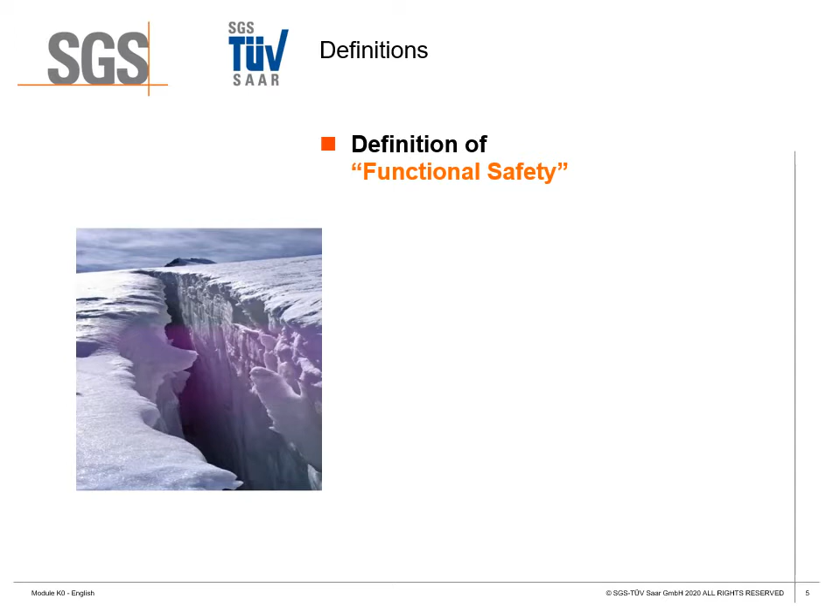Today I want to tell you a little bit about functional safety and its implementation in the automotive industry with ISO 26262. So first of all, some definitions to understand what is the meaning of functional safety. In ISO 26262 you will find the following definition. Functional safety is defined as absence of unreasonable risk due to hazards caused by malfunctioning behavior of EE systems.

I think this is a rather complex sentence, and before I explain more, I will give some more definitions about the content here. What is meant by unreasonable? Unreasonable can be seen as unacceptable, or in other words, it should be acceptable. So absence of unreasonable means there's no unacceptable risk available.

The definition of risk is also very important to understand. It is always a combination of two things: the probability and the extent of damage. If the probability is high, there's no need for a high extent of damage, and we still talk about a high risk. Or even if the extent of damage is very high and the probability may be low, even then we can talk about a high risk.

At the end of the day, we will talk more about the probability. We'll see that we have to reduce the probability of damage, and with this we may reduce the risk in total. And finally, the definition of hazard. A hazard can be seen as a state which may be dangerous for health and life. It's also important to understand that functional safety, and safety in general, talks about health and life. This is an important point to understand here.

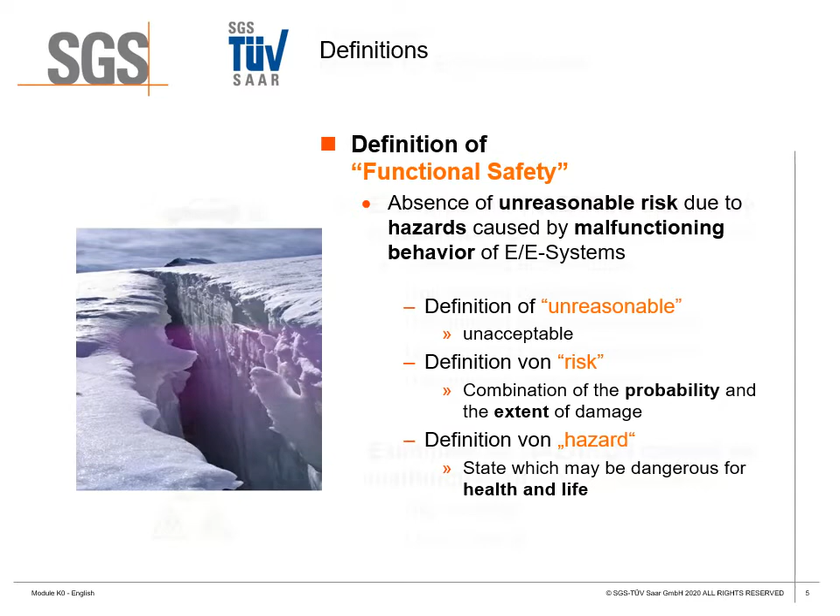Here are some examples of hazards caused by EE malfunctions. Examples of hazards caused by malfunction of operating functions are unintended acceleration, unintended deceleration, unintended loss of acceleration, unintended loss of deceleration, unintended vehicle motion, and so on. That means electronics in operating functions of the vehicle can directly lead to an unwanted behavior, to these so-called hazards.

But there are also examples of hazards caused by malfunction of safety functions. For example, we have an isolation detection or airbag function or whatever else. The loss of these functions or their malfunction may lead to high voltage, overheating, and so on. That means even functions which we bring into vehicles for safety reasons have the potential of a risk which is maybe not accepted.

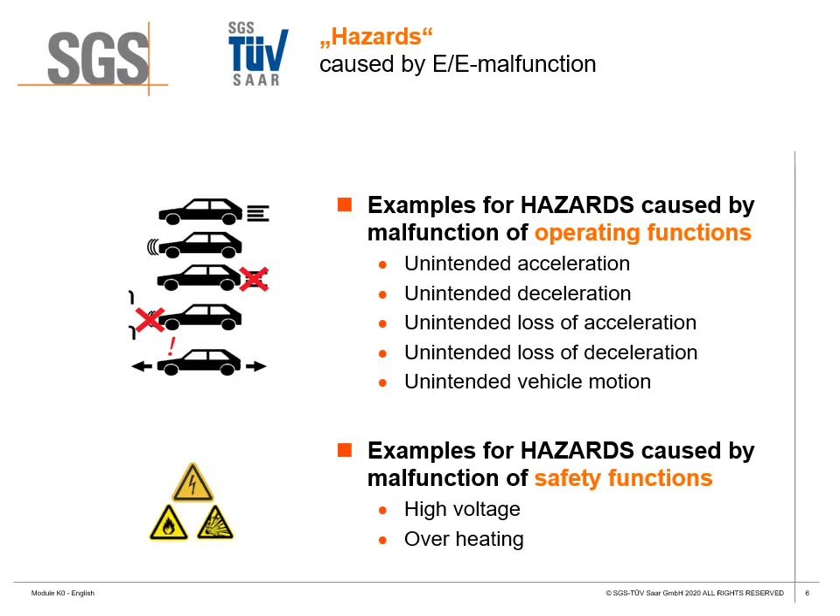So in general, we have to check which hazards may result from EE malfunction. This is typically done in a so-called hazard analysis and risk assessment. So how is it typically done? The first step is to identify potential EE malfunctions. This can sometimes be very difficult. First, we have to describe in detail the function which we implement in the vehicle, and then understand what a malfunction is.

Typically, a malfunction means the function is done at the wrong time. For example, we have a park brake, and the park brake works during driving. This can be dangerous. Or the function is not performed whenever it is wanted. For example, if we have an accident and the airbag shall open and it does not open, this is also a malfunction. This is the first step to understand what EE malfunctions are.

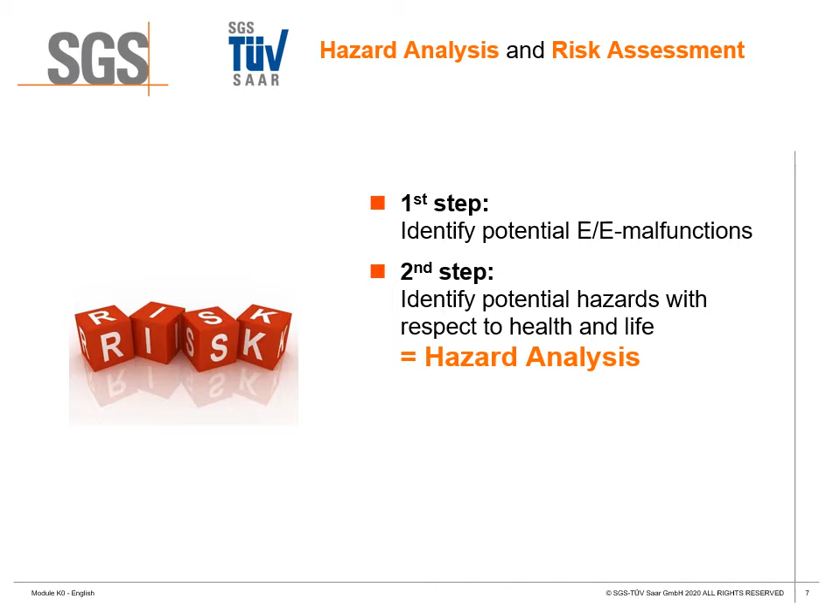The second step is to identify potential hazards with respect to health and life. This is the so-called hazard analysis. That means we have the malfunction and the typical potential hazards, as we had seen just before, an unwanted behavior of the vehicle at the end.

And finally, whenever we know the hazards, we can talk about the risks. The third step is to assess the combination of the probability and extent of damage in case a hazard occurs. This means we have to assess the risk, and this is called the risk assessment. Both things together are called hazard analysis and risk assessment, and very often we see the abbreviation HARA. This is what we have to do first before we know whether we have to go on with ISO 26262 or whether ISO 26262 does not have to be used.

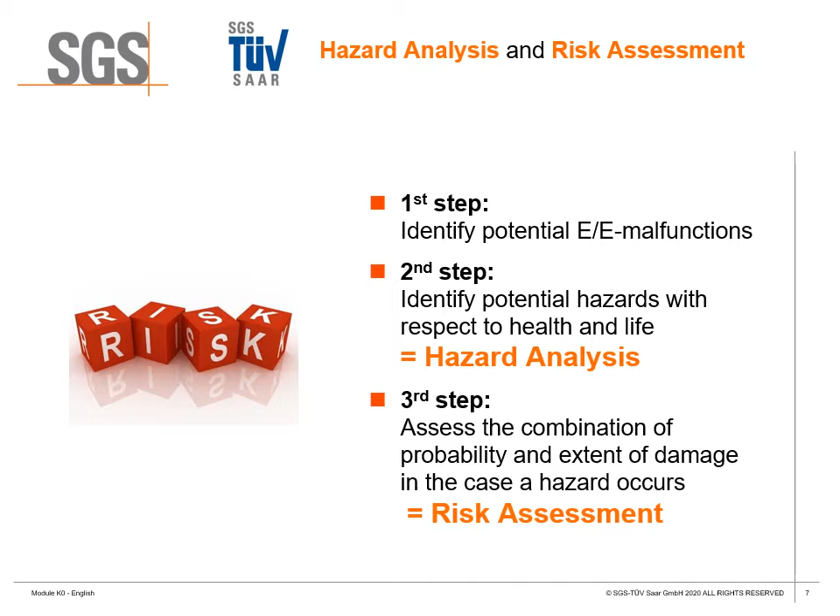Here, the risk assessment principle is shown in a graphic. It's only a qualitative graphic, of course. We have the severity of harm and we have the probability of occurrence of harm. And we have an imagined line, here called the risk acceptance limit. If we are above this limit, we are in the unacceptable risk area. If we are below, this is acceptable.

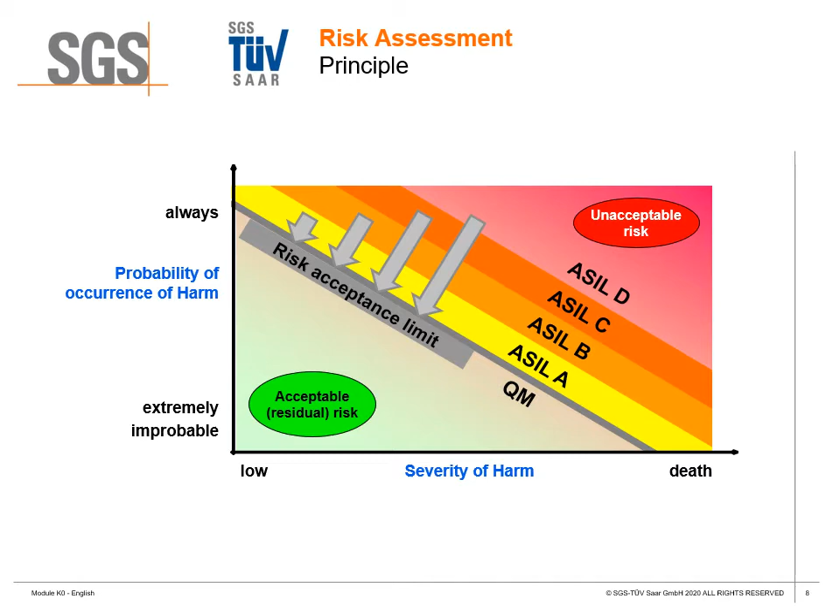And what we see here is already the level of risk which we can show: QM, which means acceptable risk, and ASIL A, B, C, and D. And this is what ISO 26262 is. It introduces a so-called level of risk for automotive functions and systems. It's a little bit curious that it's not called level of risk. It is called automotive safety integrity level.

So what does integrity level mean? We will see now, but first let me explain how it is defined. It is a 5-step scale. It starts with QM, what we had seen in the slide before. And then if the risk is higher, we talk about ASIL A, B, C, and the highest one is D. QM in this context means standard quality assurance is sufficient. Typically it is oriented to application of IATF 16949 or ISO 9001. These are quality standards which are typically used in the automotive industry.

In other words, QM means we have sufficient things already in place to reduce the risk to the accepted level. ASIL A, B, C, or D, shown here as ASIL X, means additional risk reduction measures are required. In other words, we have to do additional things beyond our QM measures. And the ASIL then describes the required integrity which has to be achieved by the determined so-called safety goals as highest safety requirements in the vehicle.

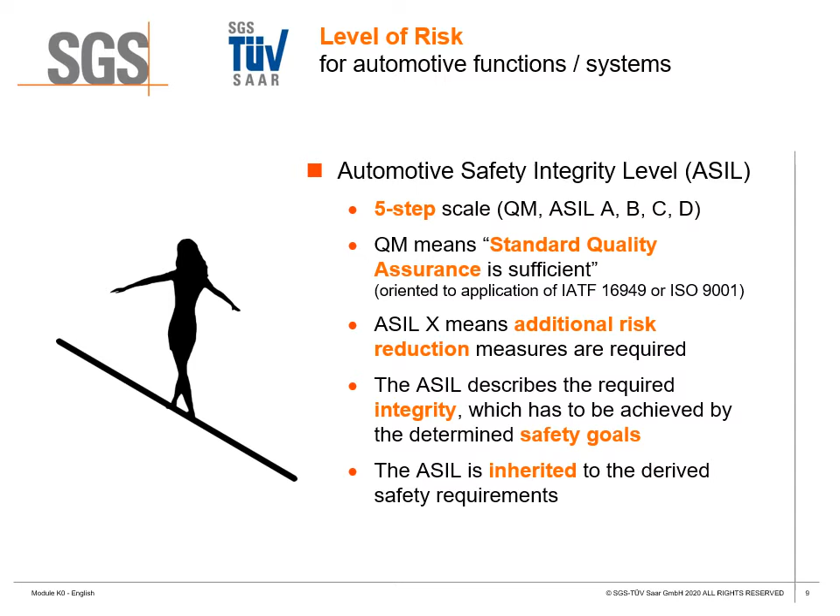So ASIL D has the highest risk, but ASIL D means that we need the highest level of integrity to achieve the safety goal, which is defined as: the driver airbag shall not deploy in an unwanted way. This safety goal has to be achieved with the highest integrity level of D. So this is the meaning of the ASIL. It should be clear that the ASIL is always combined with a requirement. It is nothing else than the integrity requirement of a requirement which we have defined at the top level in the vehicle, called safety goals.

But now, what do additional measures to reduce the risk to an accepted level mean? On the one hand, this means avoidance of systematic faults. Systematic faults are typically the faults which we bring into a product by our doing: wrong specification, bad testing, something missing, faults not identified, and so on. These are typical systematic faults.